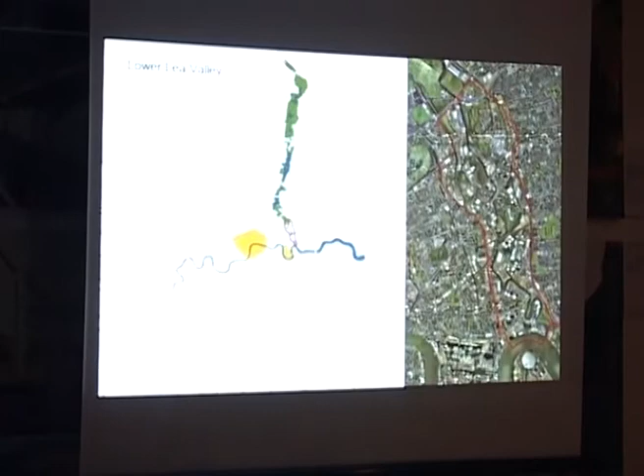The site, as described by Peter, before the Olympics, the scar, and this great diagram about how the Olympics could stitch back together the East and the West.

My talk really starts here. I gave a talk on the Velodrome and the sustainability of it to a group of 8-year-old children, and one of them said to me, but the Olympics aren't sustainable because you build it in a different country every 4 years. And they were absolutely right.

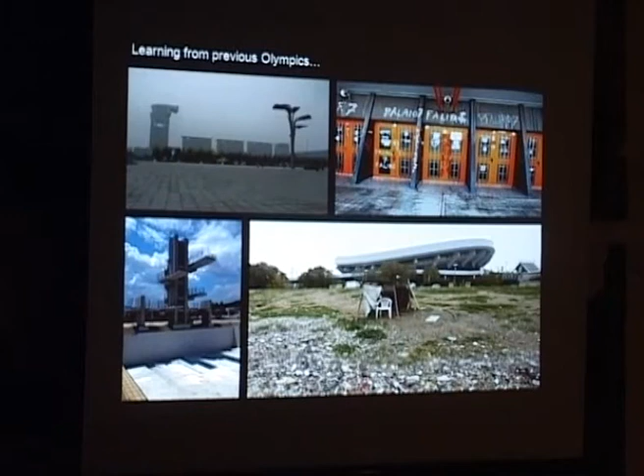These are previous Olympic Games and what's happened to the Olympic Park. I think the 2012 bid was very good in that it turned the whole process backwards and looked at what you would have afterwards and made it work for the Games. That was very much our philosophy on the Velodrome.

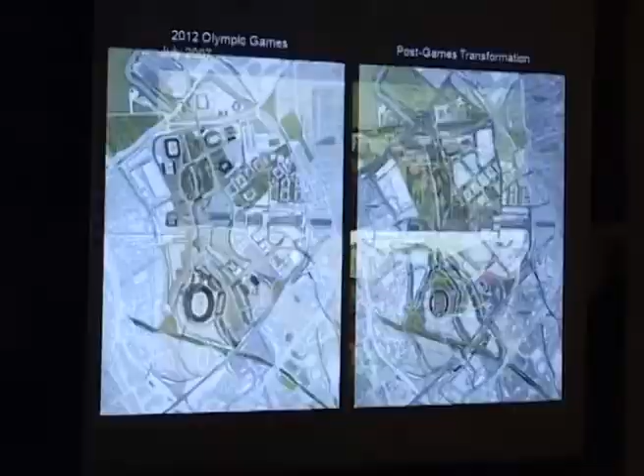So, 2 slides, the Games and afterwards. Not much difference between them visually, but in terms of thinking, it's been an enormous difference. So, that was the site before we started: a dumping ground, contamination, high levels of pollution.

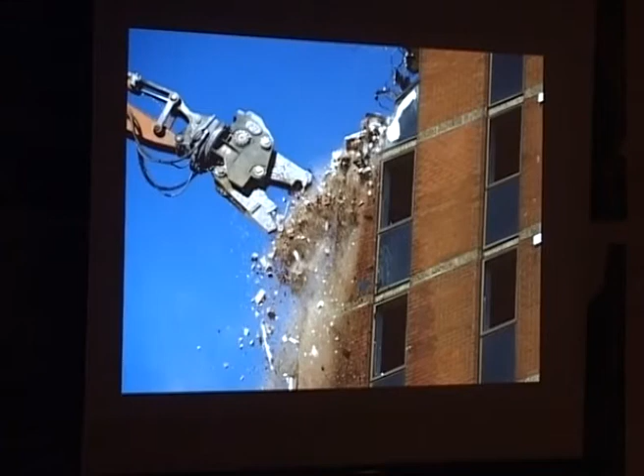So, the Olympic Delivery Authority was the client. They were organising all the venues, which were designed by different architects and pretty much worked in isolation. A large amount of demolition, compulsory purchase, and the power lines which were above ground needed to be taken down to make a site, and they were all buried beneath the ground.

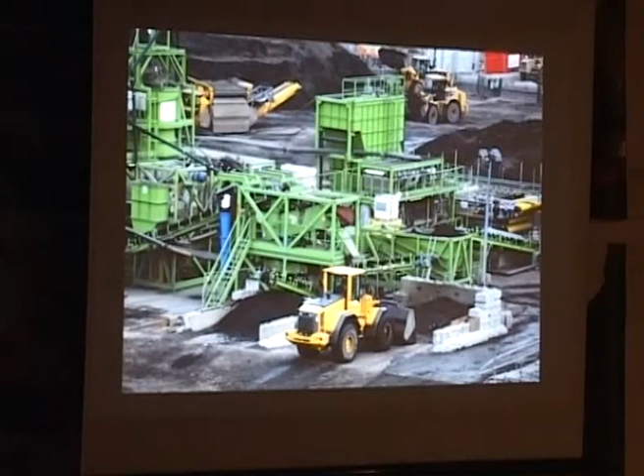The sort of thing that frankly would never have happened had you not had the Olympics and the budget and the focus and the drive to make it happen. All the soil from the site was washed, recycled and reused on the site. It wasn't just taken away or buried underground. Again, a massive undertaking, and the teams all worked together to share the fill.

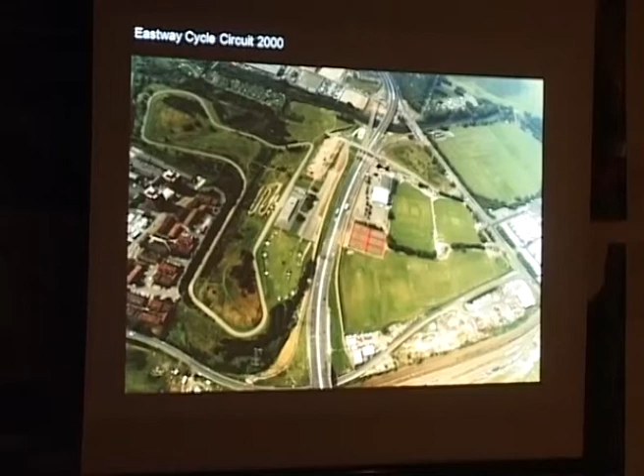This is the site of the Velodrome. This is a road that runs out of London called the A12, and on this site was an old cycle circuit from the 1970s where various riders had come and ridden, very hidden, very popular with cyclists. And this is a nice diagram.

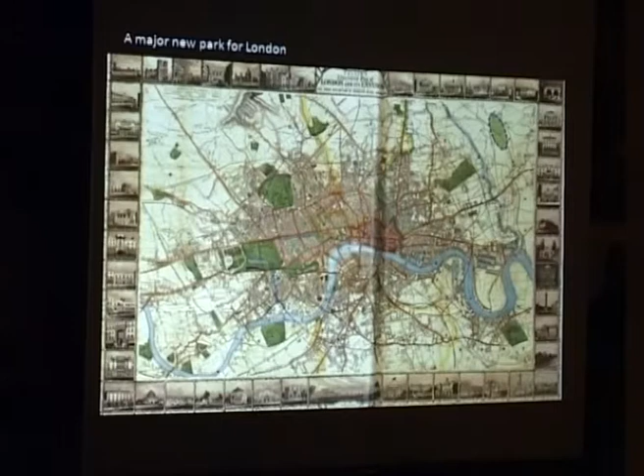This is the tradition, a Victorian one really, of large parks in London. And this is what the Olympic Park will be, the first major new park for about 100 years in London. And that really will be the main legacy of this Games.

So we looked at all the previous velodromes since 1948. London had the Olympics in 1908, and it had them in 1948. So we tracked from London 1948, which has an open-air velodrome, all the previous 16. Half of them are now destroyed.

The reason is, unlike football, cycling doesn't make any money. It costs money to run a velodrome. It's indoors, it's heated, it's an expensive operation. So that really got us thinking. We didn't want this thing to fail afterwards.

So we came up with this strategy, which was to say, I don't know if this will make sense in your language, that the Olympic Games is a house-warming party. In other words, it's a party to celebrate your new house. Actually, you're much more interested in the house for the next 50 to 100 years than the party. The party's just one night. But we kept this in our minds all the time.

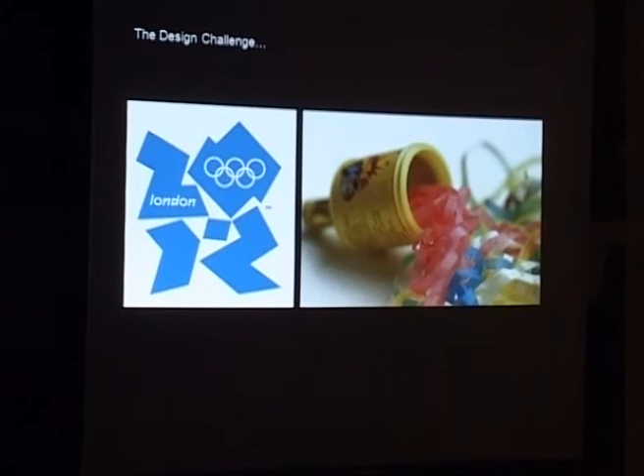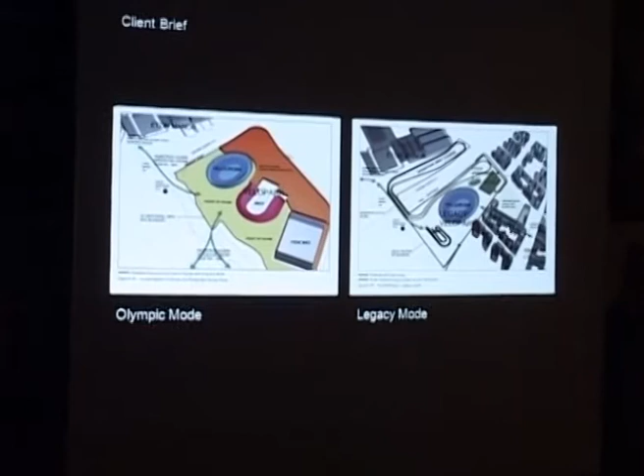We'd design it for afterwards and convert it for the party, which is the Olympics and the Paralympics. The brief we had from the client already had this idea of the future in mind, the legacy as we call it. So this was a plan for the Olympics: a velodrome, a 250-metre indoor track with 6,000 seats, a BMX arena with temporary seats, and all the facilities you need in the Games to make it work.

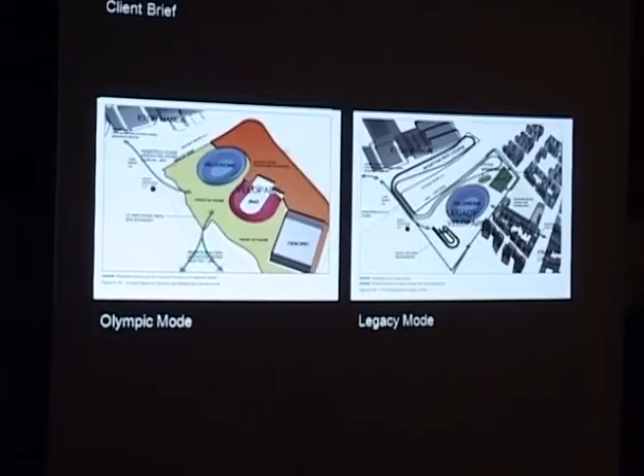Afterwards, the velodrome would remain exactly the same, a 1 mile road circuit for cycling and a BMX, and new housing would come around about. So this would become a cycle park. Prior to winning the Olympic bid, there had been a plan to put a big cycle park on a massive area, about half the Olympic park. So the cyclists were very excited about this. In fact, when we won the games, they were disappointed because they were going to get less cycling and more of other sports. So we had a lot of convincing to do.

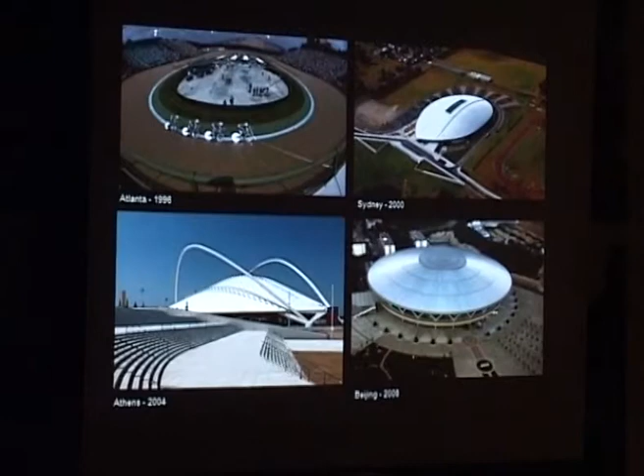We started to look at the other velodromes from the last 4 major Olympics, and it's interesting, they're not standard things at all. In Atlanta, which was done very cheaply and commercially for the first time, they built an outdoor track out of segments of plywood and used that. Not great for cyclists because of the wind and change of pressure, but very cheap. Sydney built a building, Athens put a building on top of an old track but didn't enclose it, and Beijing built an enormous Chinese hat.

And all of these were standalone objects, very disconnected from what's around them. The 1948 arena in London still exists, and it's outdoors, with 20,000 people standing around the outside of this cycle track. It's a bit bigger. And we loved this image. We thought the connection between the outside, the inside, and the spectators is what we should be trying to emulate.

It's also interesting because, as Peter said, the Olympics are not sustainable at all. This is 1948 - there's no HD TV, no high-level lighting. That is efficiency. In fact, one of the cyclists cycled 100 miles home after his event, so we can't really compete with that.

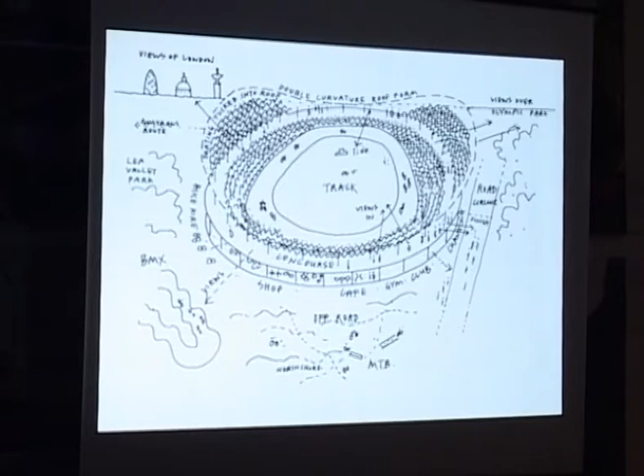So this was our concept, which was to build this very technical indoor arena, but make it connect to the outside and relate back to London. And so, taking the idea of the party and the house, we actually worked on the whole design for the Velo Park before we designed the building.

We put in the 1 mile circuit, made it cross a river, built it into the landscape, put a BMX course here, and then had about 7 kilometres of mountain biking in the centre of London - fantastic because London is a city of about 8 million people, and cycling there is very popular but also very dangerous. We have problems with obesity, asthma, congestion. It's a fantastic time to get people on their bikes, but we need fewer cars and more bikes for that to work. So there's an opportunity here for young people to learn to ride bikes.

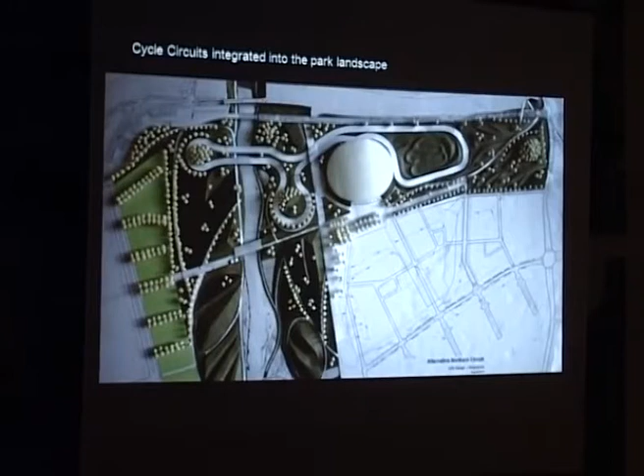So we worked very closely with the landscape architects working on the park to integrate all of these features, to work with the other venues, and to make it work before the games and afterwards. This was a model that studied the topography of the road circuit.

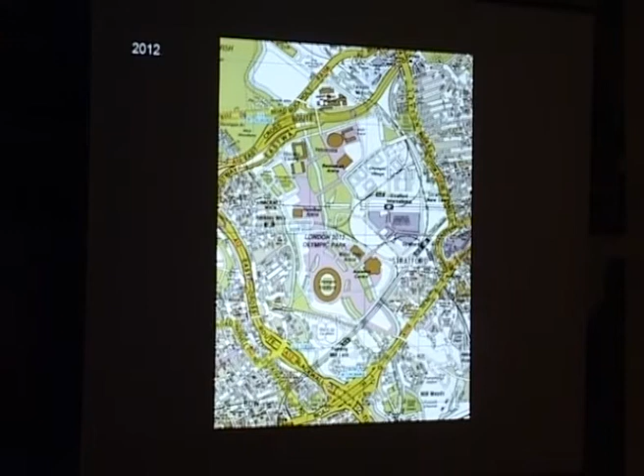So here are 3 slides which show that process very simply. Here's the map before the Olympics, 2007. Here's the map of the Olympics - the pink areas are the competitive venue areas, and the green is the park, already established. And then, several years later, when it's all been built up, the velodrome will sit with the cycle park here, but be integrated into this new part of London.

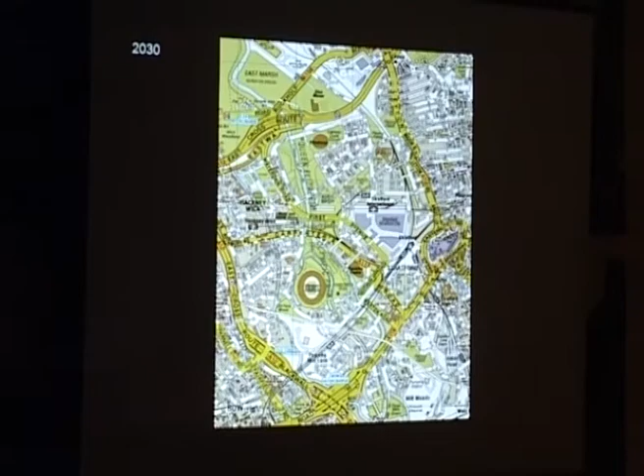Working on an Olympic project is a massive challenge. There are so many people involved, it's very hard to work out who your client is. One evening, in desperation, I got my book and tried to work out who we were actually designing this building for. I wrote down all the people we had to report to and discuss and get approval from. Then I realized I hadn't written cyclists on the list. So the bureaucracy is quite a challenge.

But the one thing that keeps everybody focused is this incredible deadline. Without that deadline, I think we'd still be in the first meeting now discussing what it's all about. So if you ever bid for one of these games, I think it's a fantastic opportunity to make things happen - regardless of the sport, it actually makes stuff happen.

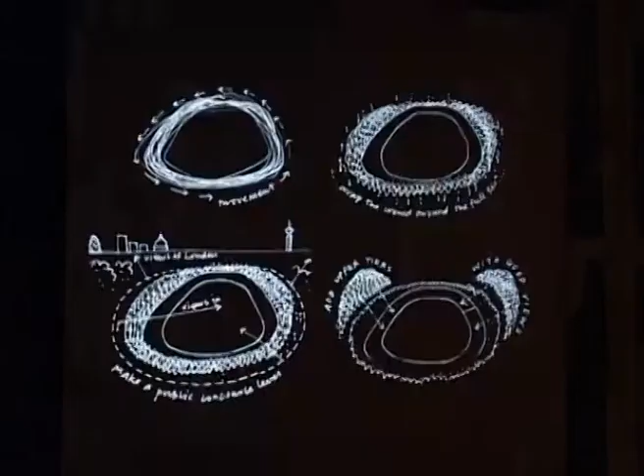So, how do you focus on this amazing opportunity to design an Olympic venue for a sport? Great Britain is a fantastically successful track cycling country in the last 10 years, and yet we don't have an indoor velodrome in London. Most people have never seen a track or a race, and yet we're the best cycling country in the world. So there's an incredible level of interest in the sport in London.

I showed an architectural critic the velodrome, and he said it makes real sense, because he'd been to see the Tour de France, waited an hour, and the cyclist went past in 20 seconds. He said, this is really clever—I sit still and the cyclists keep going past me. And that's about it. So all the focus is on the track.

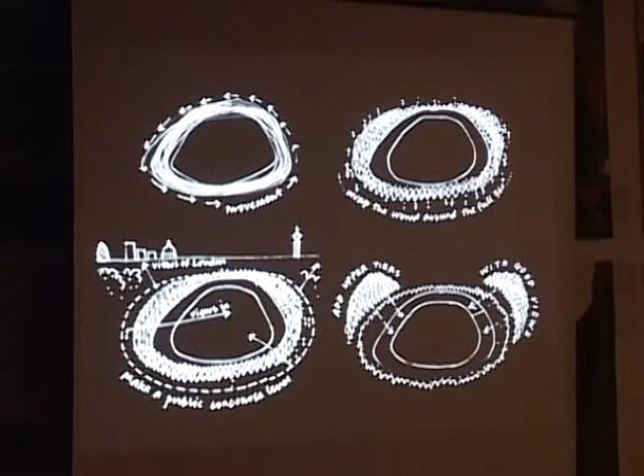And then we took the other half of the seats and put them up in the roof. So we have this ribbon of glass which breaks the building in half—very important for connecting inside and outside.

This was our very elemental image from our competition, where half the seats are in the base, there's a ring of glass, and the other half of the seats are in this roof, which we didn't know at the time what it would become.

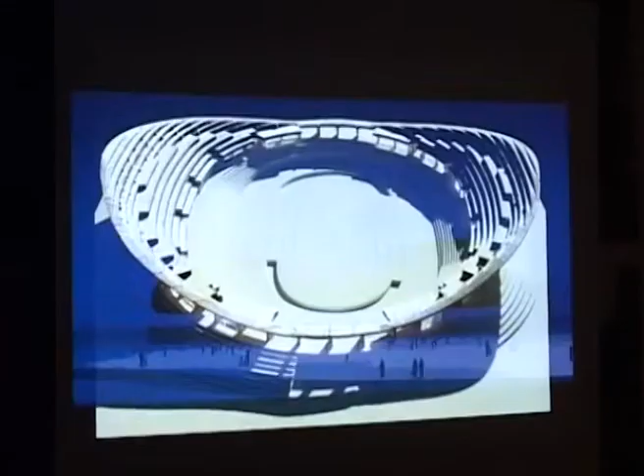That developed—we managed to get a bit more space, we could make the sides stick out a bit more. And we honed this down very finely.

Here you see half the seats, here's the track, here's the other half of the seats, here's the ring of glass. Sometimes there's accommodation here, and it all sits on this structure.

That is the shape. Here you see the ring of glass with views in.

The really exciting thing about this was that a child in the East End could be in the Olympic Park in the future, walk up to that glass and look in and see the GB cyclists, the British cyclists training in there. So that's an incredible connection between the inside and the outside in terms of the local community.

But we wanted to do more than that. We wanted to take the idea of sustainability to the absolute highest level we could.

And we looked at the bicycle. This is one of the competitive bikes from the British team. We thought, if you could make the architecture and engineering of a building as efficient as a bicycle, that would be something incredibly exciting, and who knows where that would take you.

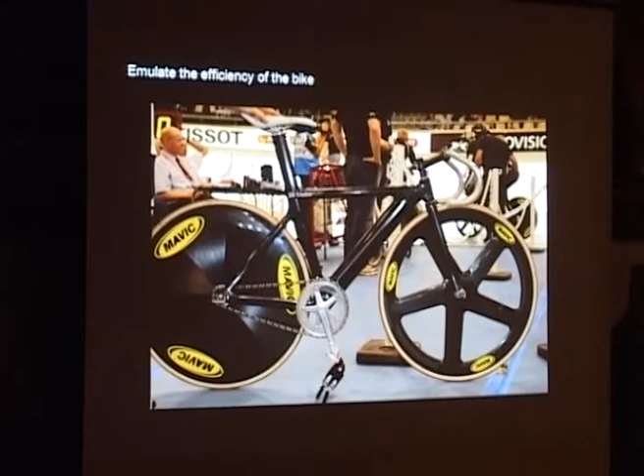We wanted to take the philosophy of the bicycle, where everything is working, everything is minimal, and every component is designed right down, honed down to the absolute perfection. And if it's not doing anything, you remove it.

So we set off on this ambitious path, not knowing where it would take us, in good faith that, rather like the bicycle, it would be beautiful at the end, because somehow form will follow function with a bit of steering.

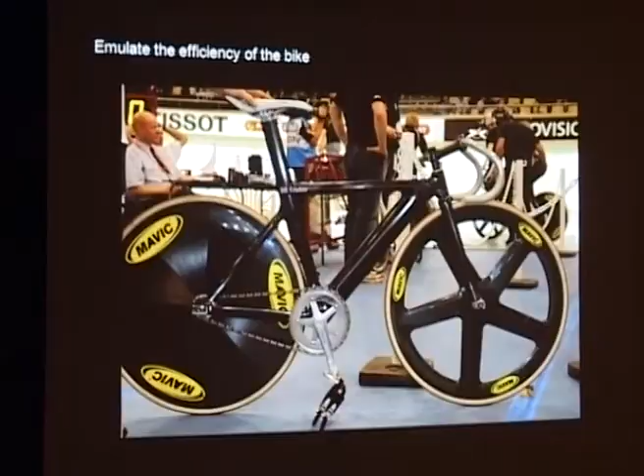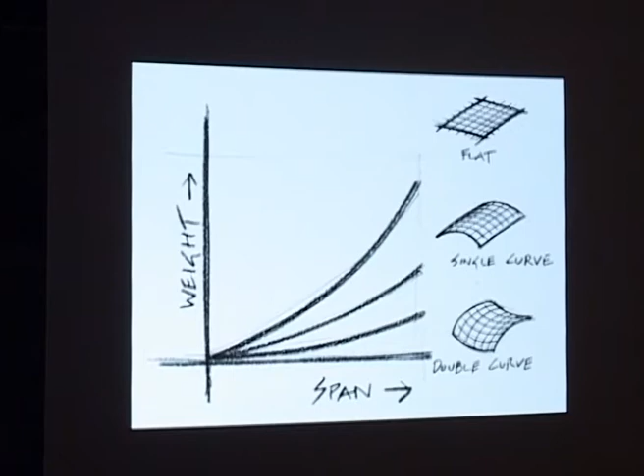It's a large building. Large buildings respond to the laws of physics, and the laws of physics tell you that in terms of a long span structure, efficiency and weight, you want to put curvature into the shape. And roughly speaking, a doubly curving shape is way more efficient than a flat or arched shape.

So, could we strip out so much material from the roof, which has to span 130 meters, that it's really like a gossamer thread?

The other thing really to note is that lots of people are doing complex curved buildings at the minute. I'm not quite sure where they get their inspiration from, but the challenge always comes in actually making them, because our manufacturing process is like rectilinear products. So it might be one thing to shape this building exactly to the minimum shape, but how are we going to make it? How are we going to make all of those curves?

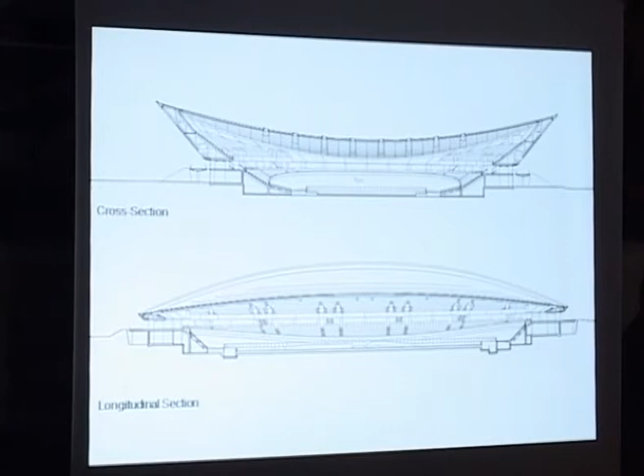So we have this complex double curvature. In fact, when the building came out, everybody called it the Pringle, because it's the same shape as a hyperbolic paraboloid, or a Pringle.

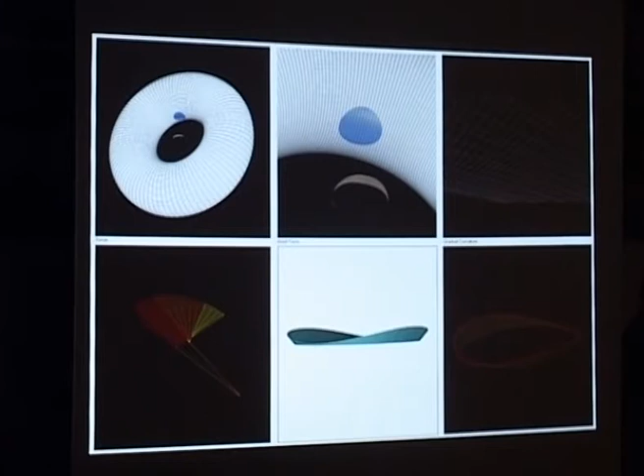Going back to the image of the saddle, how do you work out the rational geometry so you can actually make this thing, and make it efficiently, cheaply, and quickly? Well, we took the roof off a torus, so it's doubly curving. Here it is again, radiused in that direction and radiused in this direction. Here's the roof. And then the bowl we made from a series of conical elements which all intersected together.

And when you're working on these projects, the government never ever wants to admit how much it costs. They start off with a number that's so low it will be impossible to do the Olympics, but they daren't go to the press and say how much it's going to really cost. So all the time you're under enormous pressure to make the building cheaper, cheaper, cheaper, but still beautiful and sustainable.

And the way we got around this was we never ever talked to the client about aesthetics or beauty or anything like that. We just talked about efficiency. We took the bicycle analogy and talked about, if you like, speed and weight.

And that's not just steel, it's money, but it's also carbon. And so following the idea of the bicycle and its efficiency, this really was the evolution of the bicycle.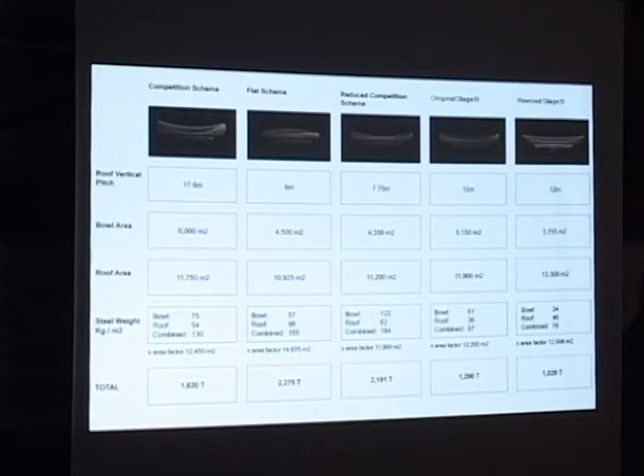And so in terms of money, it's just a comment from the person in charge of finances on the project. Really, this notion that everything that's engineered you need in the building, and people in charge of money regard architecture as extra expenditure. Well, if we could prove the architecture and the engineering are one and the same thing, we could win the argument. This is a diagram of the structural system then.

Here's where the track will go. Here's a large concrete slab, an enormous amount of foundations, because the ground had been so contaminated. It had been a tip, in fact, a refuse tip for about 50 years, so it's a terrible site to build on. And then here is what we call the roller coaster that went around the back.

We actually found a gas pipe from America, pretty much on eBay, and the contractor bought that and welded it up for the track at the back. This was all made from precast concrete with recycled aggregates and fly ash.

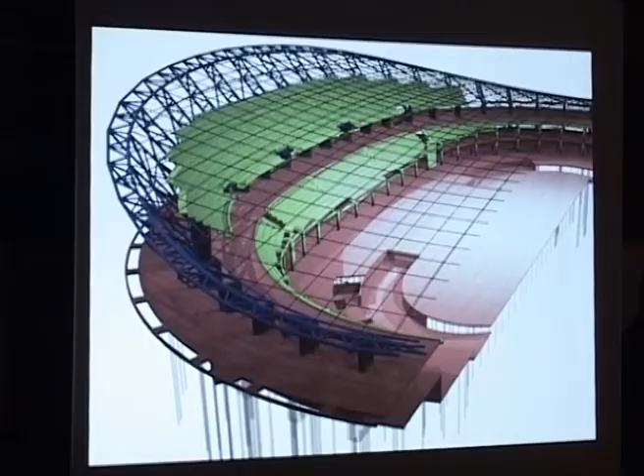And then the roof. Here you see this is the roller coaster shape. You get this idea of the Pringle, the double curvature. 48 of these sections all welded up, brought in and bolted together on site. Here's the concrete units going in.

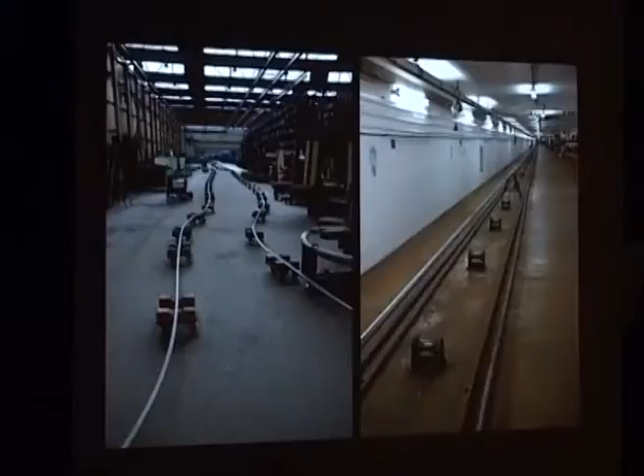And so for the roof structure itself, rather than use beams or trusses, which you would normally do—normally on a building this size you'd have trusses about 10 meters deep—we would look to build it out of cables. They're 36 millimeters in diameter, incredibly fine.

This is them in the factory in Germany. They lay out the cables and then they stretch them to take out the elasticity, and mark exactly all the intersection points.

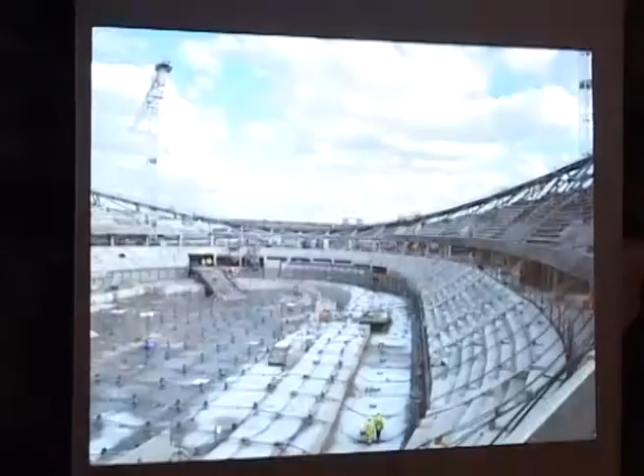This then comes to site with a load of German operatives who are very good. They bolt all the cables together on the ground, lay them over the seating here, exactly within 2 millimeters of where they should be. This is a European problem, because British steelworkers work to maybe 50, 100 millimeters accuracy, and the Germans work to 2 millimeters accuracy. So we had a few arguments over that.

So this is all laid out. Here you see a bit of London snow. They start to tension it up and pull this net into place. And what's fantastic about this system is there's no scaffolding, there's nobody working at height—it's very safe, very quick, very efficient. The blue is a net, a safety net, which is already in place underneath.

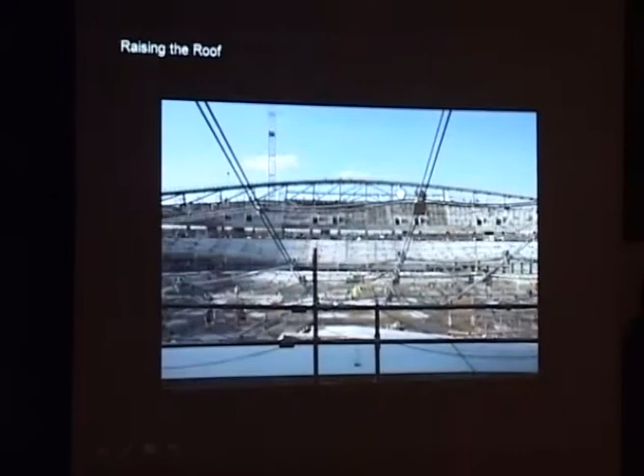It's just a quick movie of this thing going up. It literally went up in a day and was pulled into place. Amazing thing to watch—it took longer than that to draw it.

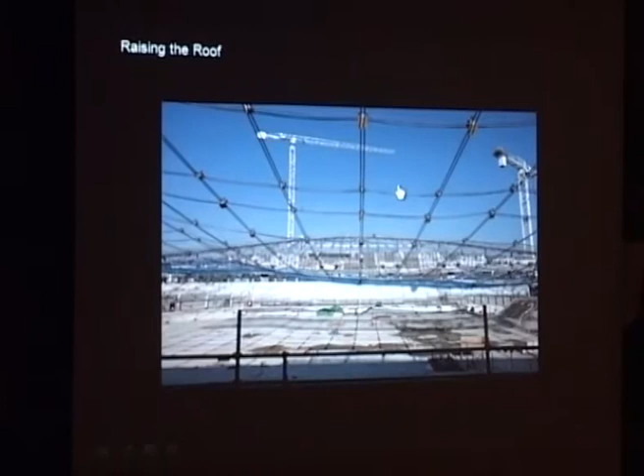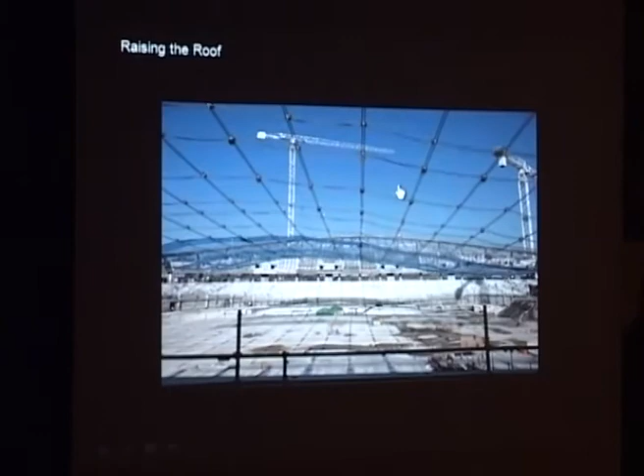See, the sun does shine in London sometimes. So you get the idea.

And then this is the famous gas pipe. Here's the connections around the edge. When that cable was pulled almost into place, it was locked off here and bolted. This was the only scaffolding we had to put on—just a handrail for safety around the edge.

And here you see the cable net pringle fully formed. You get this idea of the curvature, the shape, very clearly from that. This is where the roof lights will go. Here's your 36mm cables, and this is about 3.6 meters.

If you remember 1972, the Olympics in Munich had the most wonderful Frei Otto cable net structure. We'd only really got back to that point here. That was a design 40 years old now that still looks amazing, but it only had a perspex cover on top—it wasn't enclosed.

We needed this building to perform at very low cost in the future after the games, so it needed to be very heavily insulated. We have 300mm of insulation on top, so we needed a solid roof on top.

The real innovation, if you like, was finding a way to put solid panels on top. And the way we did that was through devising this node that would allow the movement of the cable net to come into the solid panels.

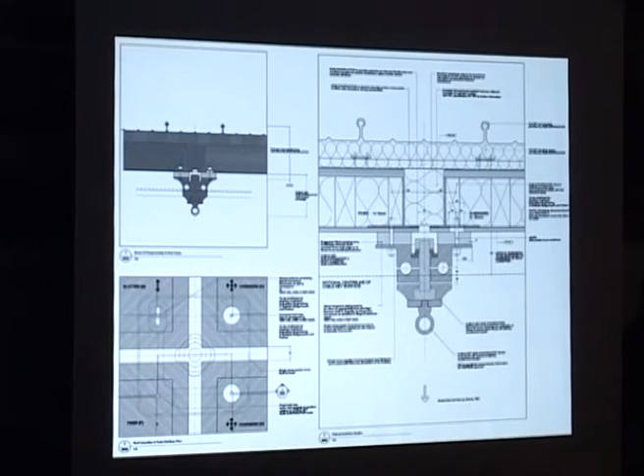It's too complicated to go into great detail now, but it was made from steel that had been stamped, clamped onto the cables, and then 4 panels would fit onto the corners.

Here you see it clamped onto the cables, and these various fittings allowed the panels to move. We had a series of wooden panels here—1,800 of them, slightly different sizes, as you might imagine, because of the curvature. Then the insulation on top, and then a metal roof on top of that.

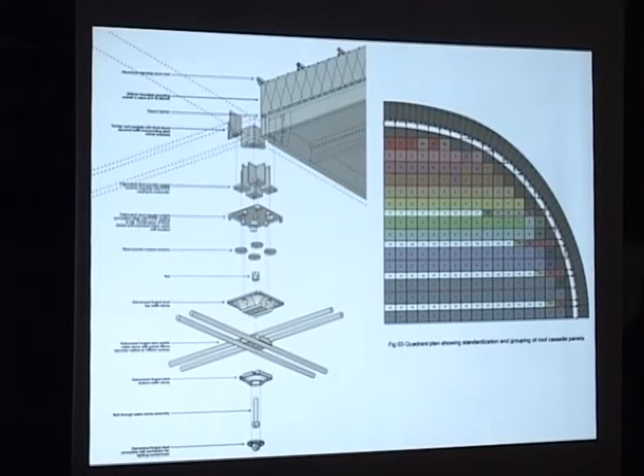These panels were all made in the factory, just simple wood, plywood, pre-made with some waterproofing on top. They were lifted off a lorry and then dropped onto these nodes like this.

I've now got a movie, but I made it on my telephone, and you're going to have to look at it on its side, I'm afraid, because if it's not on a Mac, a PC turns it on its side.

This is one of the panels being lowered into place. Here's the safety netting.

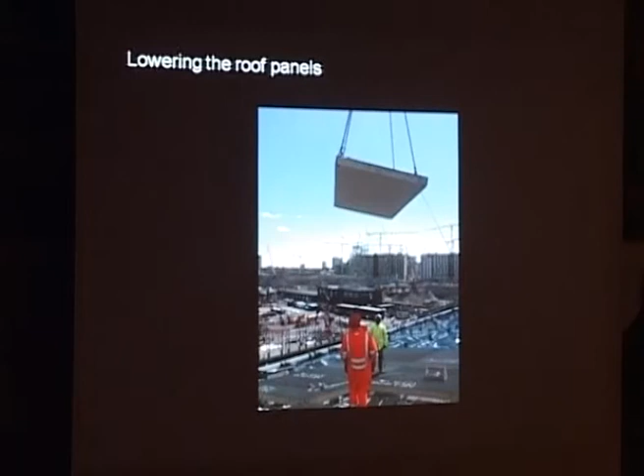No, go back one. Okay, if you just click on it with the mouse. Yeah, thanks—there you go.

So here's one of the panels just lowered in.

We had to number them all, we had to orientate them, because they varied by about 5mm to make sure they fitted in. Working out the tolerances was incredibly complicated because the cable net moves when you put the panels on. Anyway, they just came in and dropped them on, and I think out of 1,800, only 10 of them didn't fit.

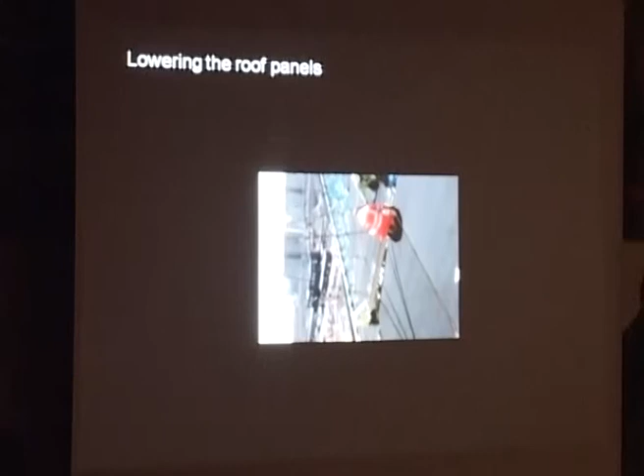There we go. And then they had to be fixed down—again on its side.

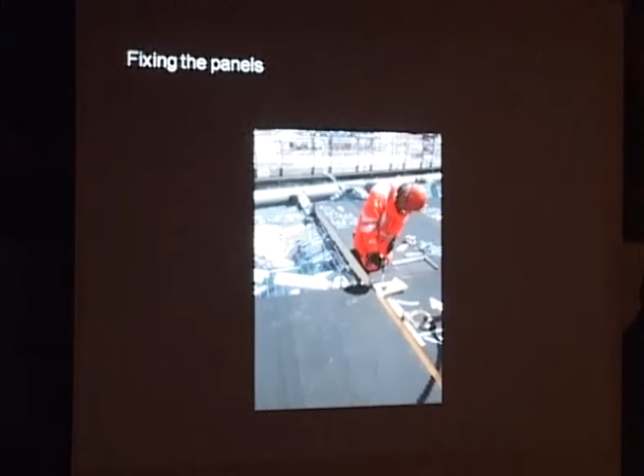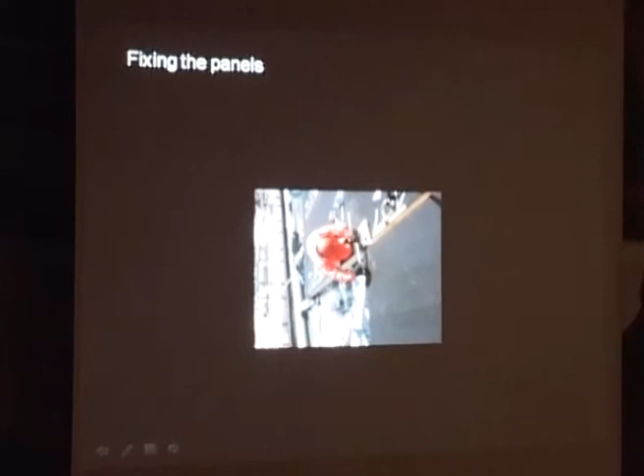He just puts the bolt in and then puts a torque wrench on to calculate the correct amount of strength in the bolt, and that's how the pieces were fixed on.

So in a way it was very simple materials, a fairly straightforward process, but lots of thinking time to make it work. I think it's a good model for how architecture should be—using sustainable materials, using as little material as possible, making it very efficient, but putting your effort into making it elegant.

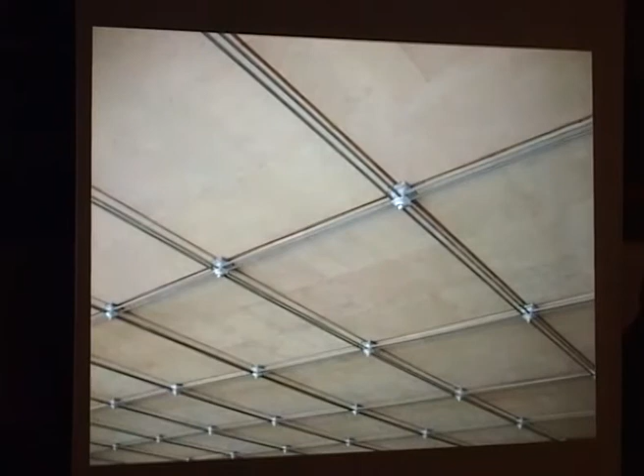Here's the cable net, and here you start to see the final effect inside before the roof lights went on. Then when the roof came up to meet the edge, we had a very complicated detail as you followed this roller coaster around. We made those rather like making a wooden model of an aeroplane out of a series of segments, which we made flat and then clipped onto the edge frame.

Going back to cost, there's only about two things in the whole building that are curved. One is this beam around the edge, and the other is the cycle track. Everything else is made out of flat sections.

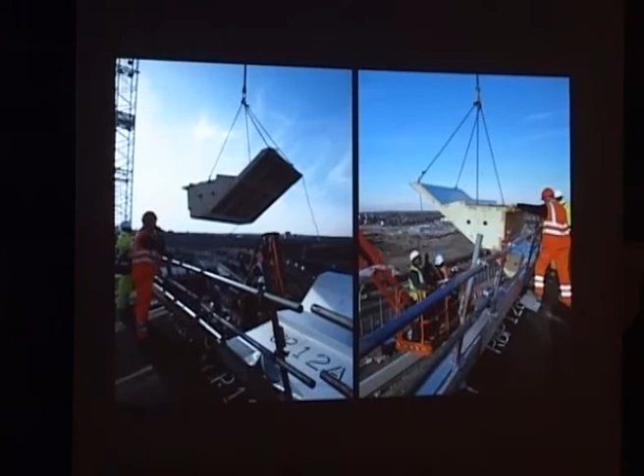Here's a mock-up of one of the pieces. Here they are arriving and being bolted onto the outside of the ring beam. This is where the gutter would go. Here you see the East End of London.

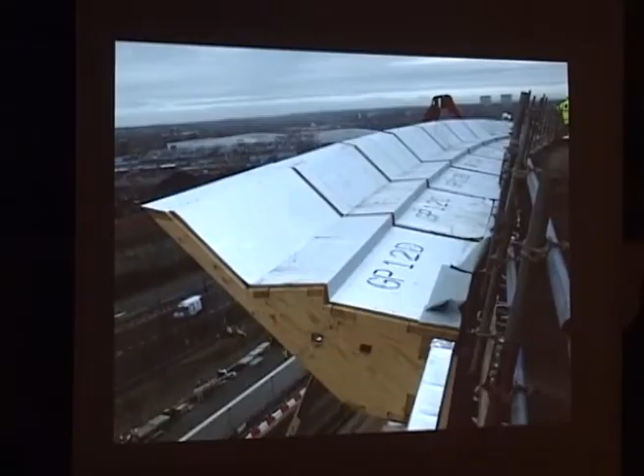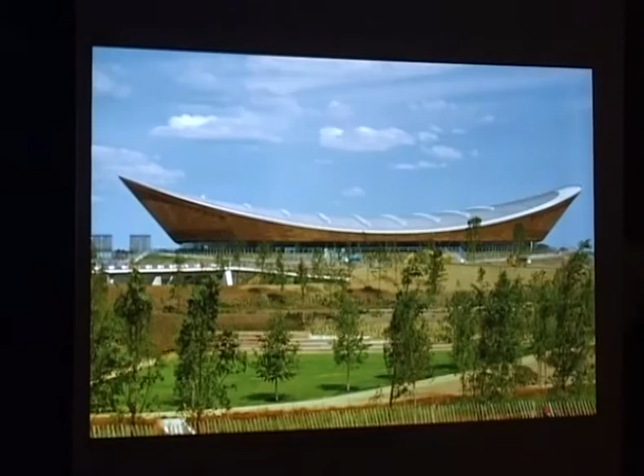And they're relatively simple technology, and you start to see these facets. This is the sharp edge of the building.

And then you see how important that is to the kind of crisp appearance of the whole thing. So the cables are spanning across there. These cables are holding it down from the wind fluttering it. Here's the roof lights. Here's metal on the top and the wooden cladding and the ring of glass.

So the park literally goes right up to that glass. The other kind of big idea we had in terms of efficiency was, after this notion of the bicycle, could we shrink the building, rather like the lycra on the cyclist's thighs, stretch it as tight as we could, so we would not make the building any bigger than it needed to be.

So we put a lot of effort into making it as small as we could. And that meant that this point here was as low as it possibly could be, and this point was as low as it possibly could be, to make the structure and seating work.

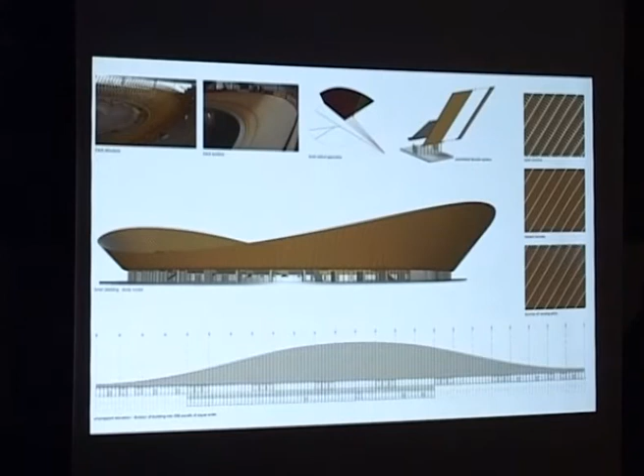And what that meant was that there was a connection between the outside and the inside, because the seats are tight around the track and the envelope of the building is tight around the seats. That helps us pick up the shape of the track in the shape of the building. So it clearly is a cycle venue, very dynamic, very exciting, hopefully.

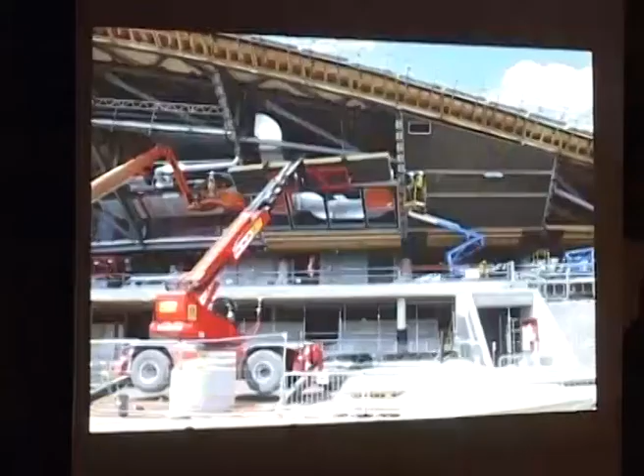And the outside walls were made in a similar way to the roof. We prefabricated them and bolted them on. And that was all very good, except the guy having to make the mechanical systems had very little space. He had to fit all his equipment in this area here. Here's a picture of the pieces going on.

It is actually a very big building. And the real challenge is, and this is why 1948 is no longer relevant, the cyclists like to break world records. The city hosting the games wants London, Athens, Sydney to have the world records. And the way you break world records in cycling is having a very, very hot atmosphere inside, unless you're at altitude, and maybe a slightly humid atmosphere, because the air's thinner and it takes off hundredths of a second.

And the cyclists, when they're training, will literally have a laptop. They'll tell you the temperature and the humidity, and they will balance their time against world records like that. Amazingly sophisticated. What a nightmare, though, because they would go around at 30 degrees centigrade. They're going at 50 kilometers an hour. They're not going to get hot.

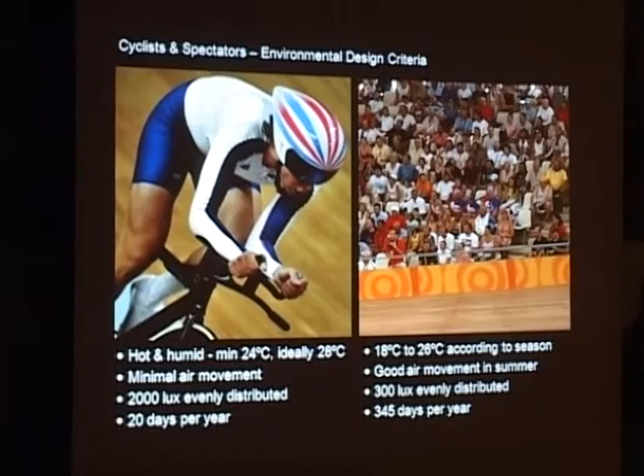People sitting in the crowd high up will get swelteringly hot. So you had to balance all the time the need of the cyclists and the need of the spectators. And we did that not by using any particularly sophisticated means. We haven't got photovoltaics, we haven't got ground source heat pumps, we haven't got all these fashionable things that make buildings sustainable, and yet we can argue this is the most sustainable modern sporting stadium anywhere.

We have good daylight, good insulation, simple heating systems and natural ventilation. And we did that by running a series of tests on the aerodynamics, on the ventilation, modelling in great detail, because we had to be sure that there wouldn't be drafts on the track, because the cyclists are very particular.

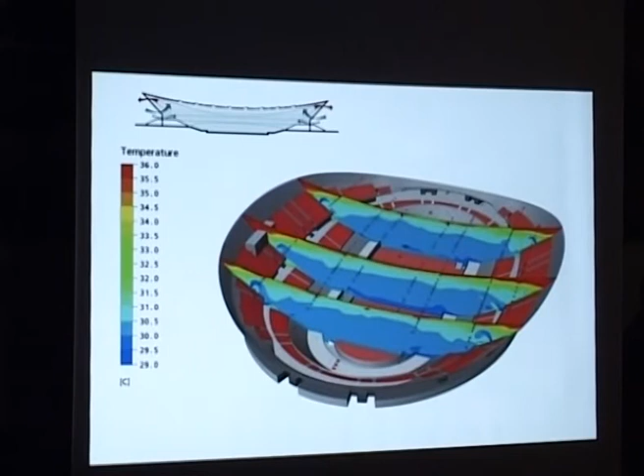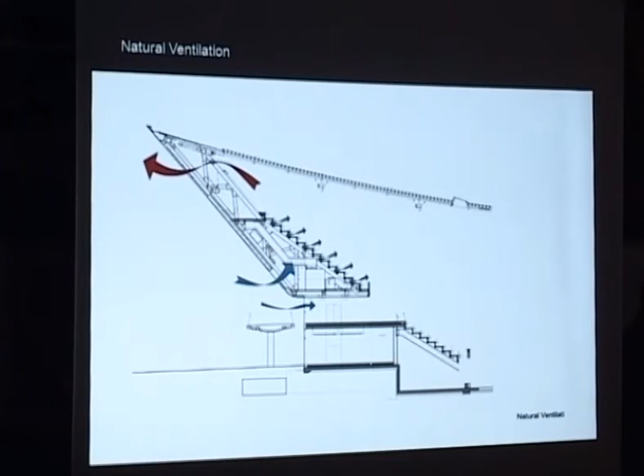They don't want cold air or air moving around them. They want it warm, but they want static air. And we modelled all of that, modelled temperature, air movement. And we have three means of heating it. Because we have a high point on the building here, it's good for taking warm air out. The spectators can stay cool by bringing in cooler air underneath the seats.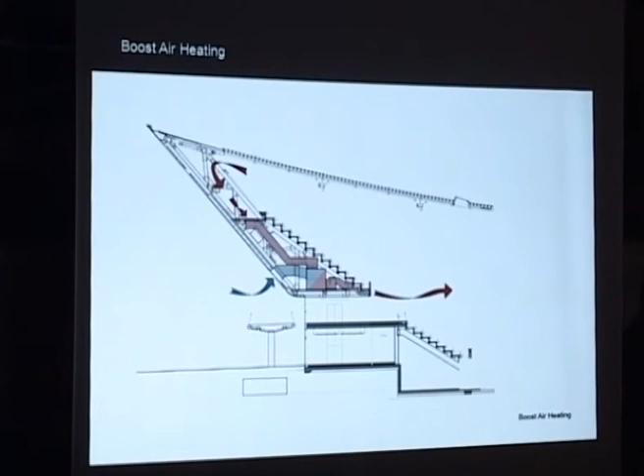We can heat that air with some units here and warm it up if needed, so if the building's not quite warm enough for the cyclists before the event, we can warm it up. Other than that, there's an enormous amount of underfloor heating that you put on two weeks before an event to warm it up. When the guys are training afterwards for the next 50 years, you don't need that on at all, they can just ride around as though they're outside. So this can be switched on and off, and you're not spending money afterwards because we've got all this insulation in the top.

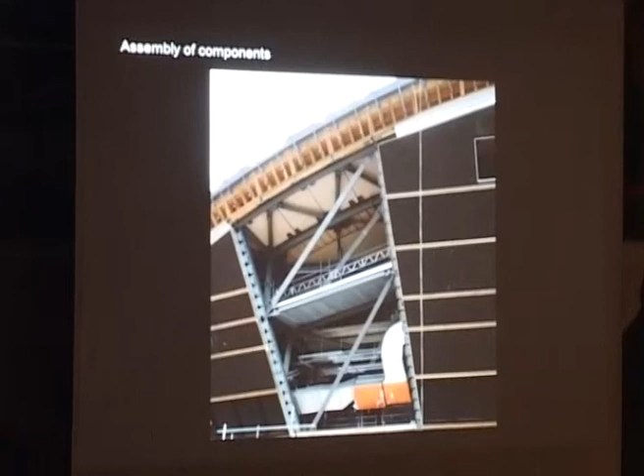This is how it breathes. These slots on the outside take the air in at low level, out at high level, and these are the boosters inside. That was all coordinated with the architecture, quite difficult. But having said we're going to make the building very small, the benefit of squeezing all this in was that we saved an enormous amount of material on the outside of the building.

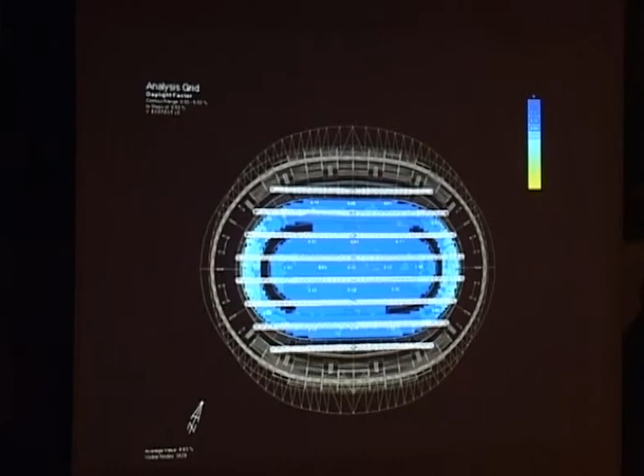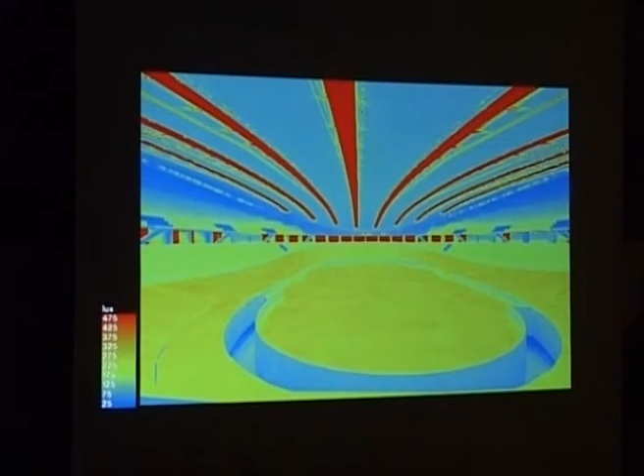We did a lot of work on the roof lights. Because the roof moves up and down, we had to make sure the movement of the roof would work and it would be waterproof, and that the daylight levels on the track were uniform. You need about 300 lux to ride on that track normally. The Olympics say, no, we want 2,000 lux or more at every single angle, every single plane, because they want HD slow motion TV, and TV designs the Olympics.

This is the building inside with no lights on at all, showing how after the games you'll be able to train on there and not use electricity to illuminate it. And then we have a whole series of lights to get our 2,000 lux for the games.

They wouldn't even let us count the daylight coming into the building in London in the summer, because the cameramen are going to black out those roof lights just for the games. But we said, that's madness. So going back to our first principle, we're designing it for afterwards. We put the roof lights in and said, if you want to black them out, you come along and black them out. So the IOC cameramen will come along with black plastic and black out the roof lights.

I won't go into great detail on this, but it's the most efficient venue on the park. Obviously it's tapped into a central district system, but we had to make our building as energy efficient as we could, so it made less demand on the wider system.

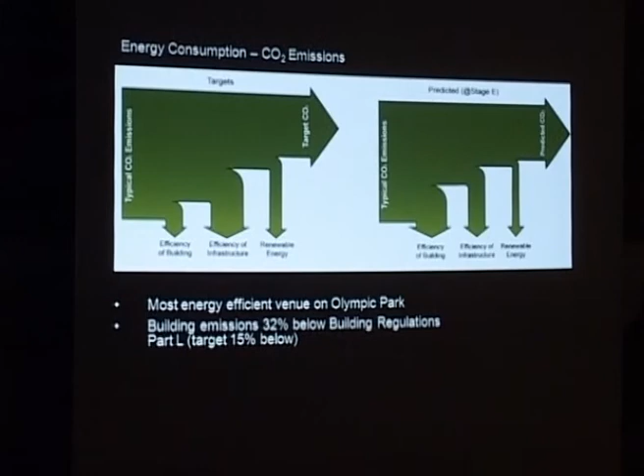Going back to the photovoltaics, people said to us, why haven't you put photovoltaics on the roof? We looked at everything, and we calculated that we would save more energy by putting roof lights in than putting photovoltaics on top, because the extra weight would have increased all the steel sizes and cables and would have had a high embodied carbon impact on the roof, which is very lightweight. We got a far better return on investment by putting glass in and using daylight.

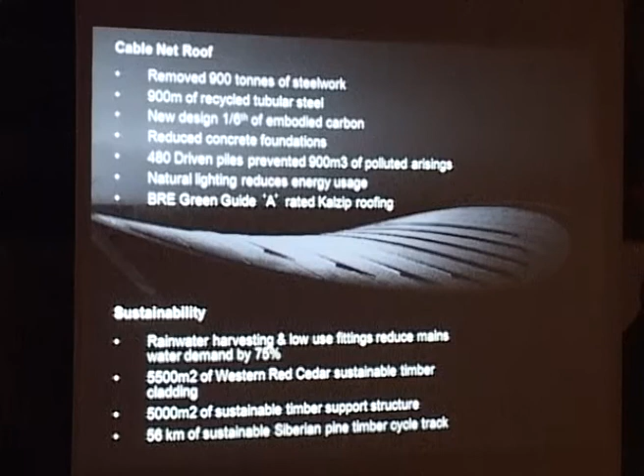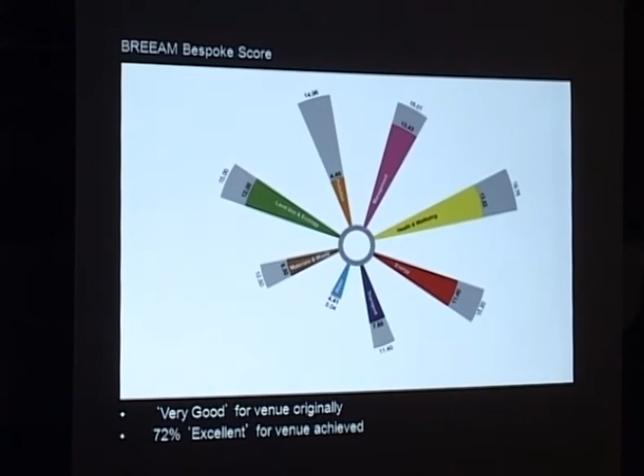We also have rainwater harvesting. A whole series of targets were hit with the building, and we have a system called BREEAM. I don't know what you have here, is it LEED, or DIN Sustainable Passive House? Anyway, there's all these competing systems around the world. We have BREEAM, and we achieved an excellent rating, and we had an enormous amount of recycled material on the job.

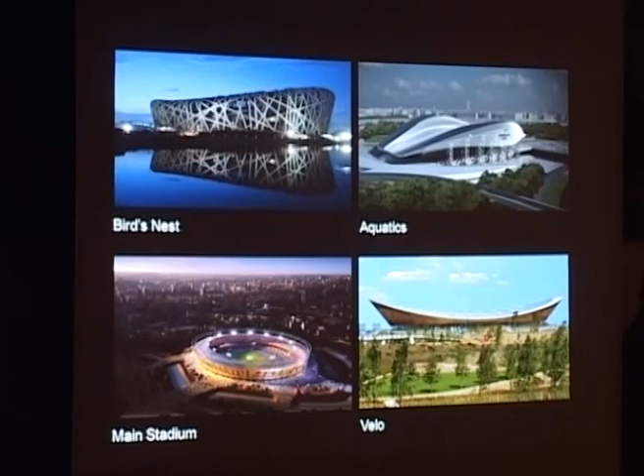And if you compare it by seat, say to the Beijing Bird's Nest, which is up there somewhere, we have an absolute fraction of the carbon embodied in the building. And in fact, the Bird's Nest is, I think in terms of television, probably the most successful building that's ever been done anywhere.

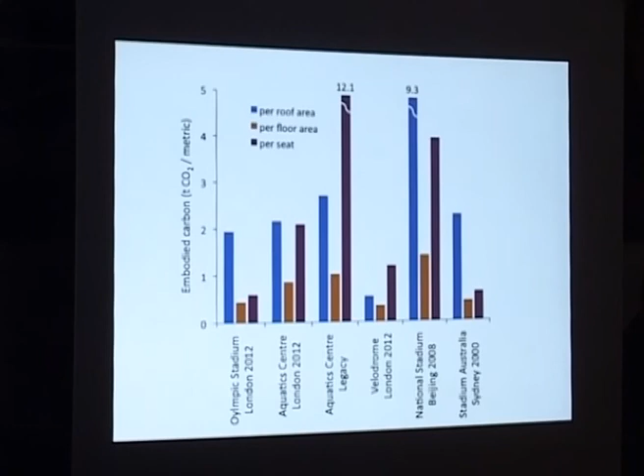And what a fantastic image. But in terms of sustainability, possibly one of the worst, because the amount of steel in that is absolutely ridiculous. We looked at it and they put some photovoltaics on the top, and said, well, it's a sustainable building, we've got PVs on the top. We did a calculation, and said, if you use those PVs to pay back the carbon from, say, Beijing to Sydney, because it's the same size building, it would take 2,000 years of those PVs to pay back the carbon overload. So when people talk about sustainability, you have to really watch it. They mostly talk absolute rubbish.

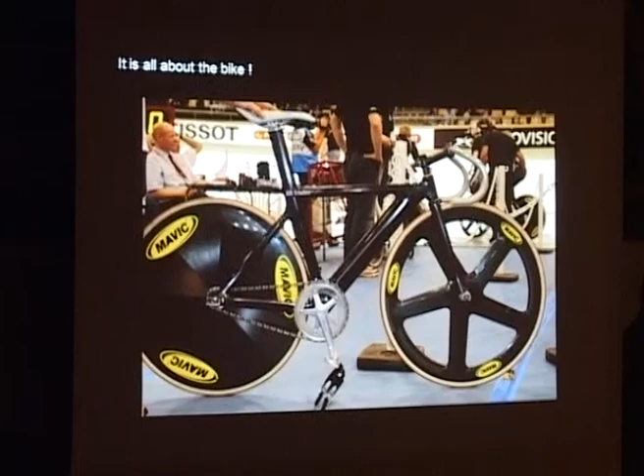It's made from Siberian pine. It's 250 meters long. The track is 7 meters wide. There's 850 of these trusses that go around, all laid at different angles. Then a team of 20 carpenters took 8 weeks to install these timber laths. They're 40 millimeters by 40 millimeters, nailed in by hand, one on top of the other. The lengths are about 5 or 6 meters, so they can bend them round.

Here you see them going in.

Has Belgrade got a velodrome? I can't think. Don't think it has it? So, do you want one?

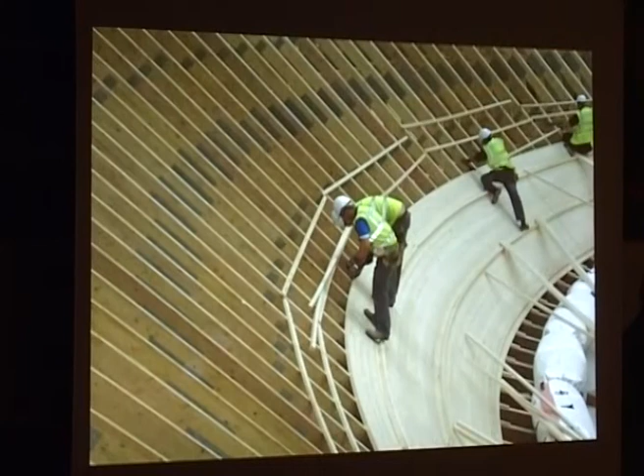Here they are going in, being nailed in. Very steep, as you can see. And there's the final track.

And then this, I think, is a fantastic space, probably the best space in the building, the space underneath the track.

Then 1 year ago, the track was opened and the cyclists came in and cycled around it. They're used to these velodromes, which are boxes, all artificially lit, and they thought it was fantastic to go in a venue with lots of daylight. Then 2 months ago, we had a World Cup event, which was the test event for the Olympics in London, and it was in here with 6,000 people. Fantastically exciting, big success.

One of the things we've done was we worked with Chris Hoy, one of the British cyclists, on the design of the venue and consulted with him, and he had 2 or 3 ideas that were really important. He really appreciated putting the crowd all the way around, because he said what happens is you normally ride down this side and all your family and everyone's cheering. You then go down this side and you have the reporters and the judges and the IOC, and they all just sit there, so it goes quiet. So we managed to move the press high up, so you get crowd all the way around to give encouragement to the cyclists. He also made sure we couldn't let cold air come in through the doors, and he also got us to make sure we had a toilet underneath here so you could get to it very quickly.

And there were 3 world records broken at the event, which was a big success. This is our Scottish champion cyclist.